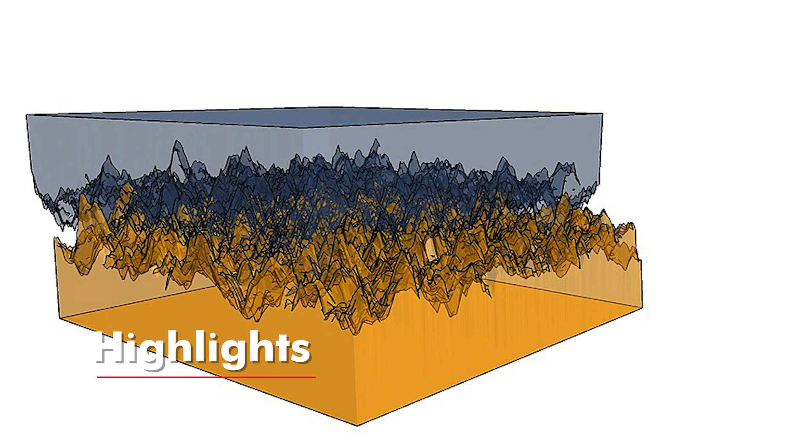There is no perfectly flat surface. Every surface, if you look at it from the micro angle, will have ups and downs, undulations. Is it possible to create a system of moving parts where friction can be negligible, close to zero?

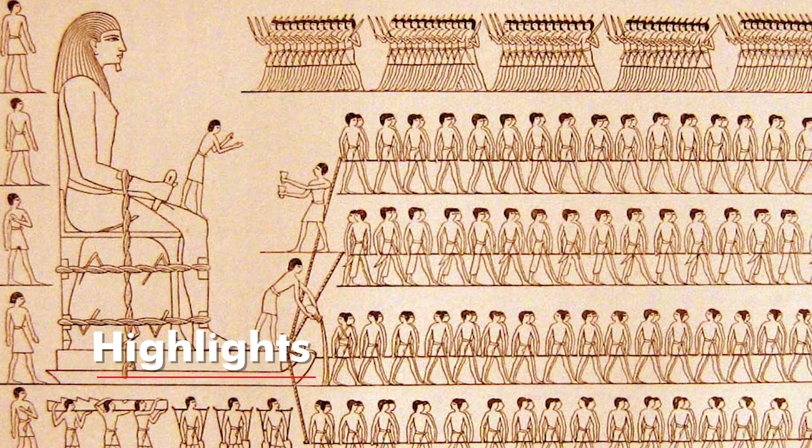Not exact zero, but the ancient cavemen, when they discovered fire, they were playing with friction, right? Exactly, they were the inventors of tribology. Probably yes, and there's also a painting in ancient Egypt I had seen long back, where the slaves are moving the stone to the pyramid, and somebody is pouring oil on the rope.

Now you're talking about a fluid film which is in micrometers, very thin. But even inside that, there is friction between fluid layers. Interesting. Now, pretty curious about grease's component, I never thought what grease is made of.

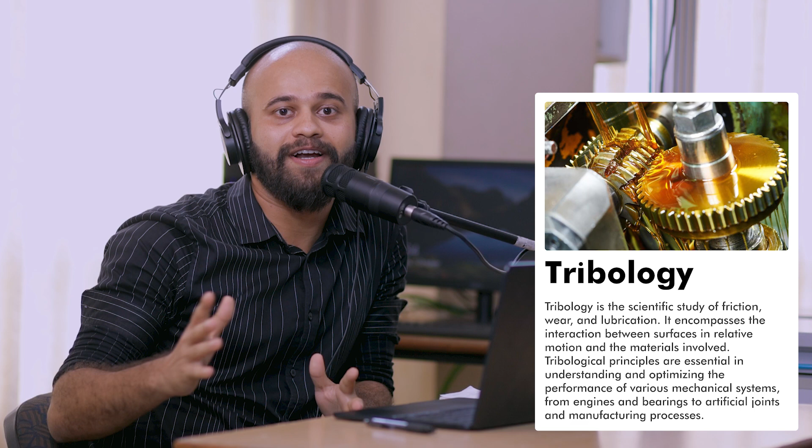And the most interesting part of it, one of the most interesting parts of friction is friction has its own field of study, and it's called tribology. I was intrigued when I heard that four years ago, that friction has its own field of study. Today we have a chance to get deeper into tribology, and the guest for today's podcast is Dr. Binu KG. Welcome to the podcast, sir.

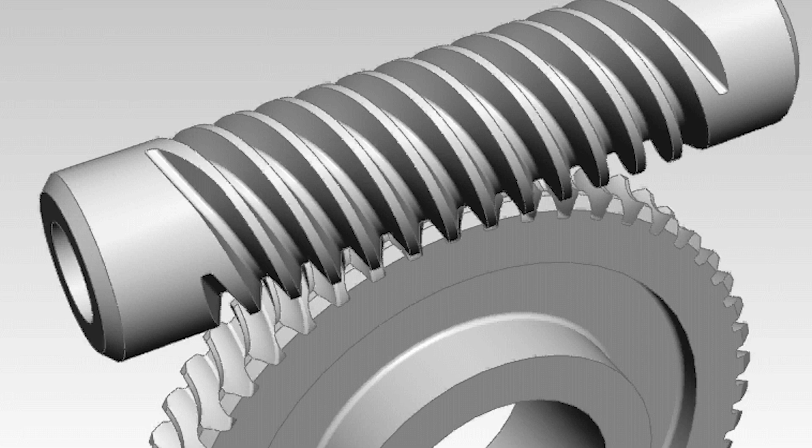Let me begin by saying relative motion is crucial to our existence. Everything we design as mechanical engineers, everything that moves, there will be two surfaces in relative motion, under force, pressed against each other, and they move - usually, most of the time, in opposite directions. That surface contact induces friction, because there are two surfaces.

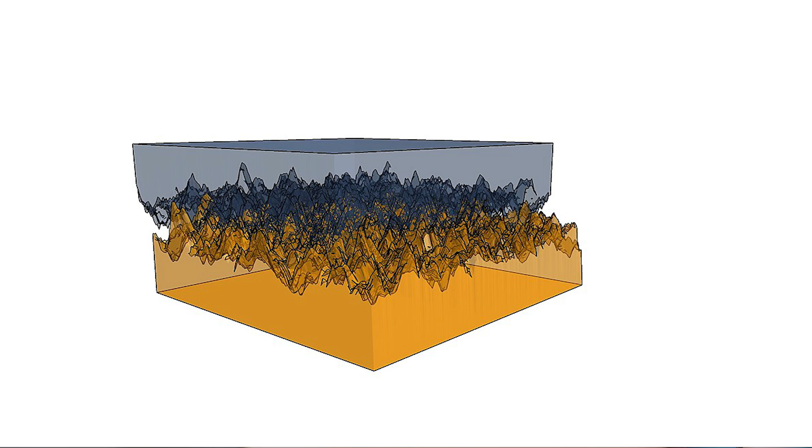Any surface, if you view it at a micro level, will have asperities - there's no perfectly flat surface. Every surface, from a micro angle, has ups and downs, undulations. And those undulations, when they rub together, generate heat. A good portion of the prime mover energy you provide to move the surfaces gets lost as heat, and this happens because of friction.

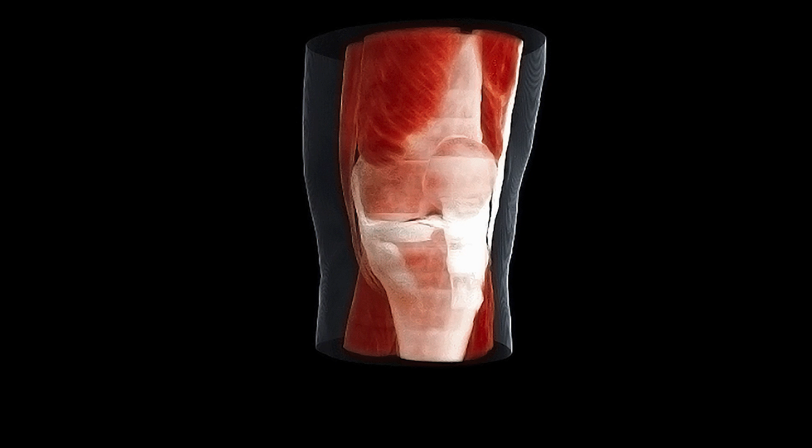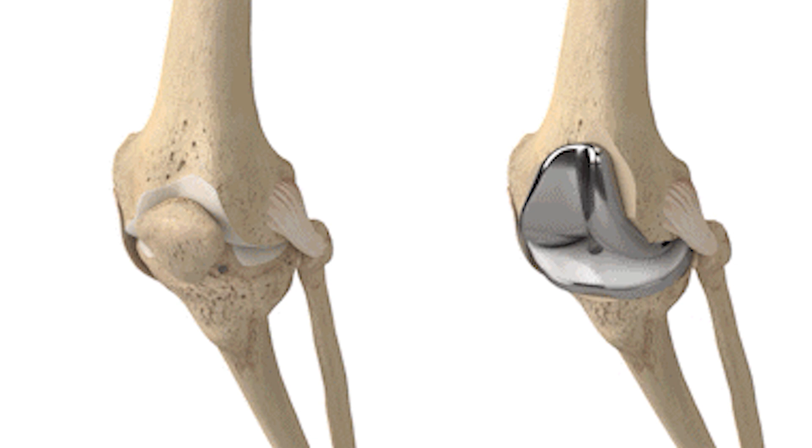Since you're from a life science background - take the example of a knee joint. The bones move relative to each other when you're walking, and there's synovial fluid that acts as a lubricant. So friction is there between them, and when it dries up it makes a noise as well, which can lead to arthritis, if I'm right.

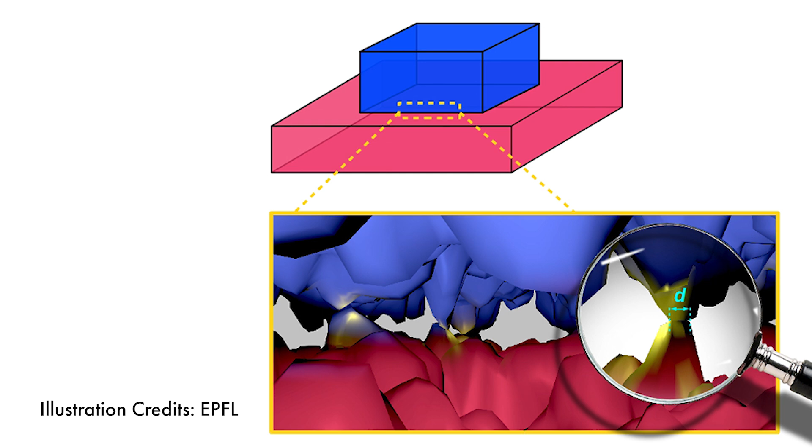So friction is fundamental in physics - wherever there are surfaces in contact undergoing relative motion, friction is unavoidable. It's fundamental. Fundamentally they're caused by the topological differences, the undulations in the surface - the asperities. So friction is very atomic, not a macroscopic phenomenon - it happens at the microscopic level, but it is observed macroscopically.

When we study friction, we study it from both the micro and macro level. At a macro level, you're not worried about the undulations or asperities - your systemic view is at the macro scale. But when designing precision instruments, you need to study at a much smaller scale, because even a minute one degree angle will induce a heavy loss. So tribology is a field where you study systems at both micro and macro level.

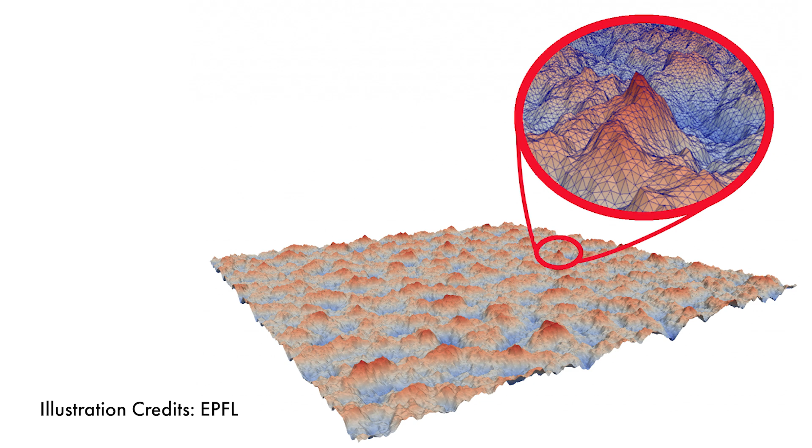There is something known in my field as nanotribology, in which friction and wear are studied at the nanoscale, where the physics is not the same - classical mechanics doesn't play a role. Instead you have quantum effects in play, and you also have to think in terms of non-Newtonian behavior.

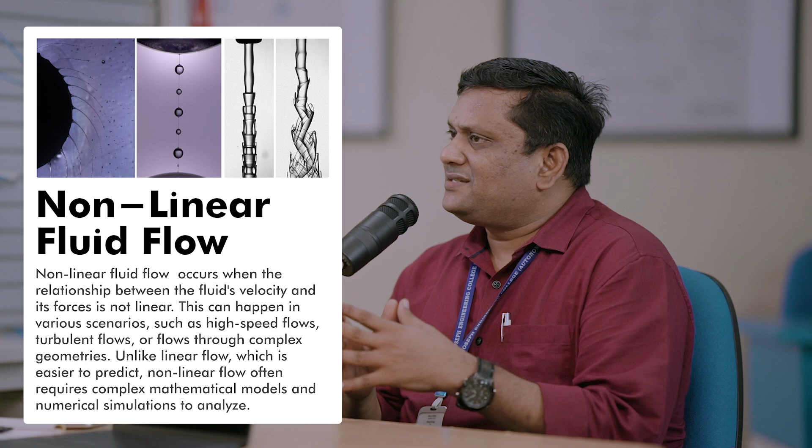If you are talking about fluid motion, then Newtonian fluid mechanics won't apply. There is non-linear fluid flow that you have to study. So yes, it's quite interesting, both at the micro level and at the macro level.

So any other unusual places you mentioned about the knee joint? Everywhere. Let me give you an example - computer systems. Right now processors are extremely powerful these days. So even CPUs also, there is a lot of friction that takes place there.

In older systems, there are a lot of electronic systems - let's talk about the case of a fan. The processor needs to be kept at a minimum temperature, therefore you have fans there, and the spindle of that fan runs at an RPM of 1500, where there is a lot of friction involved. So how do we keep that system working well? There are electronics also.

There are a lot of applications these days. When I hear about friction, I recall a sport called curling. Have you seen that? There are players sweeping the ice to control the direction of the stone and even the speed of stone to direct it to hit. Have you not heard about that game? Curling. Okay, I have not heard much about it.

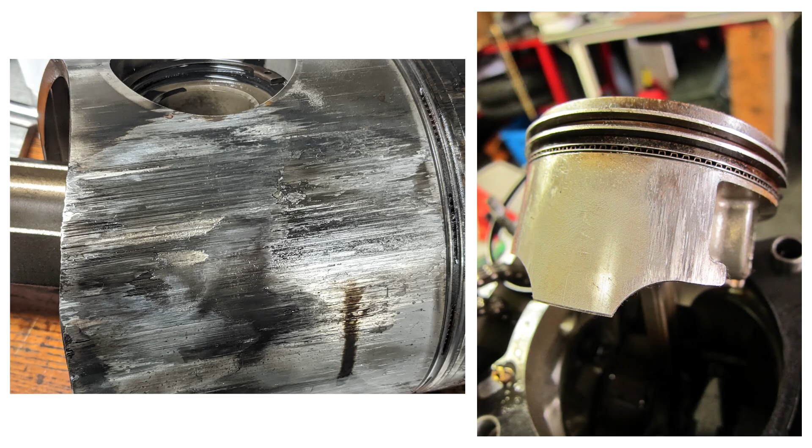Absolutely, there will be lubricant seizure - like the engine got stuck. Exactly, that's precisely - seizure is like imminent. The moment you have oil starvation in an automobile, seizure is like imminent. It will happen, it should happen in fact. Cost me a lot.

My professors used to always say that it is important that we link lubrication to the discipline with which we live. He used to take it to a philosophical notion, where he used to say that the good food habits that you have, the exercise that you do, all these are the lubricants that keep your body running smoothly.

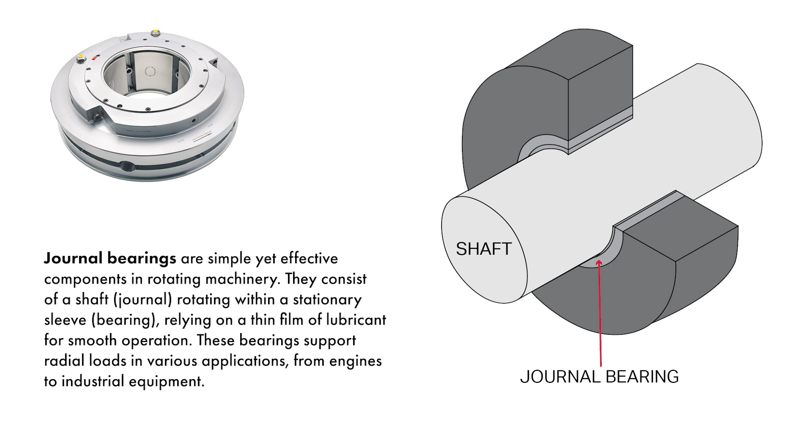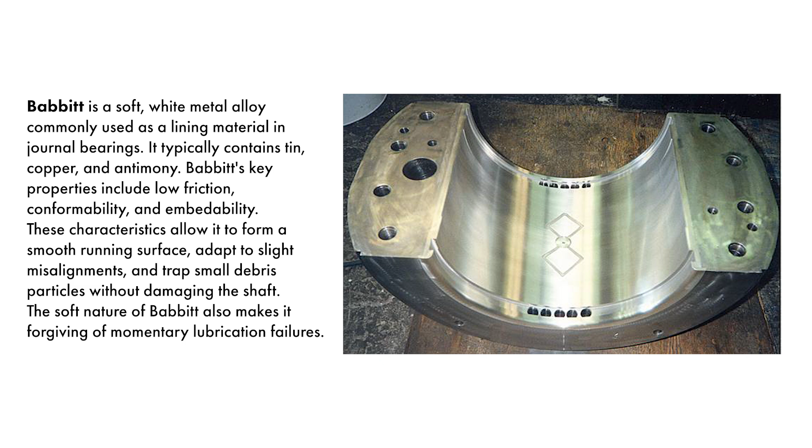You have a shaft, and in between the shaft surface and the bearing surface, you have the lubricant. That's how the rotary system works. Now, this bearing's inner lining can be Babbitt lined. Babbitt is a material with very low shear strength, so the moment there is shear, it shears off in small amounts. Once that Babbitt layer is completely worn out, you can reinstall it. So you're avoiding contact of two hard substances by providing a much lower shear substance in between. That is one way to bring down friction.

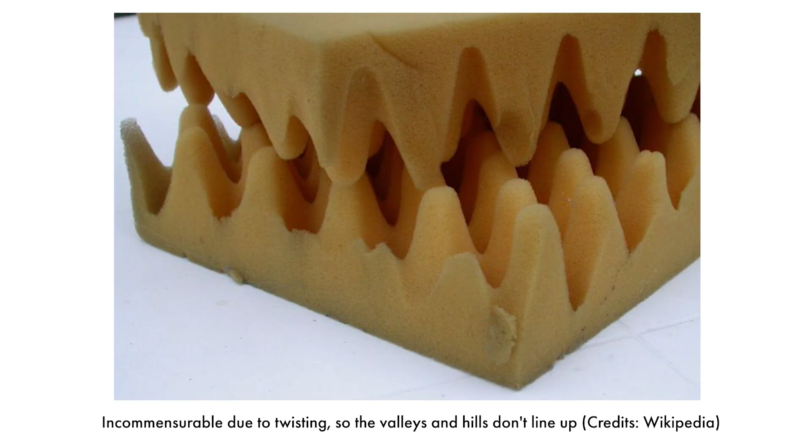But to completely remove friction, it's not possible. You'd have to get deeper into atomic level and play with the surfaces atomically, aligning the undulations perfectly. If the undulations or asperities align, they get stuck. If they're misaligned, in different directions, then it can actually be reduced.

One aspect of my research involved nanolubricants, which is a lubricant in which I add inorganic material as lubricant additives. These additives are at the nanoscale, typically 100 nanometers. I worked on something called TiO2, titanium dioxide. There are plenty of additives out there that have been worked upon, and some lubricants available in the market do have nanoparticles as lubricant additives.

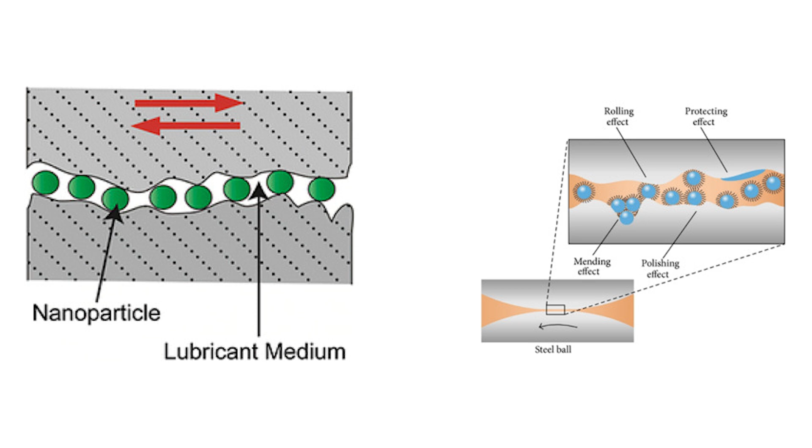But the issue is something else, I'll speak about that. When you have nanoparticle additives present between the two shearing surfaces undergoing relative motion, these particles, being strong, tend to break the undulations and even it off. They fill the space where there's a valley, and some of the peaks they break off. That way it's a mending effect on the surface, which then brings down friction.

How significantly? In my research, the use of nanolubricants has been found to bring down friction by 15 to 20%. That's the reason why there's plenty of interest now. The amount of research and publications happening in the field of nanolubricants is quite high. So there are definitely benefits.

But the issue is when you're adding nanoparticles to a fluid, it affects the shelf life of the lubricants. These nanoparticles, unless they remain in a suspended state, don't contribute. But when you keep lubricant aside in its bottle or can over a period, these nanoparticles, which have very high surface energy... when you go to nanoscales, individual particles have very high surface energy, their surface to volume ratio is very high.

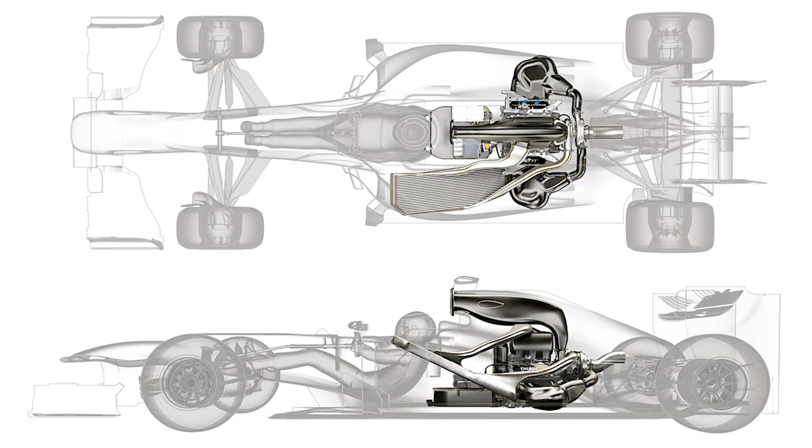So it's not a new science, but over the years the need for efficient lubricants became very high because we now have powerful machines. Why is an F1 vehicle possible? We have prime movers that can power that, but on a practical level, unless you have the tribological knowledge to prevent friction in such high-powered machines, they will not work. So growth in the automotive sector, transportation, and manufacturing is made possible because of the knowledge we built up in eliminating friction and wear. Tribology as a field of study has grown along with every other field.

There are three things tribology as a field looks into. Primarily, friction, which is one important component of this field of study. Second is a result of friction, which is wear, defined as loss of material under frictional force. The third aspect is lubrication. So friction, wear, and lubrication are three important components of tribology as a field of study.

So you can say it is an intersection of physics, mechanical engineering, and material science. A lot more than that, I should say. Mechanical engineering is fundamental because it deals with the forces involved, wear and tear. Friction comes from physics, and lubrication from material science. Is there any other component or field of study?

Physics is important, material science is important because tribological property is highly subjective to the material we use. There is a lot of chemistry involved too, because in a lubricant there are plenty of chemicals that we add to promote the creation of a thin film between the two interacting surfaces. So chemistry plays an important role. Physics, chemistry, mechanical engineering, material science for sure, and then the way you have modeled the system, mathematics plays a key role. Therefore, it is an intersection of multiple fields.

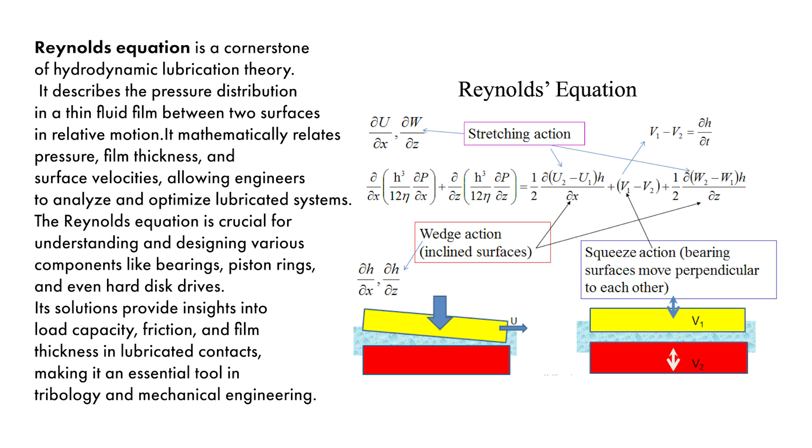So, I'm talking about hydrodynamic lubrication here. Let me break it down a little bit for you. When you have two surfaces and a gap in between in which you have your lubricant, there are three things that can happen.

One is the load that acts on these two surfaces is such that it will bring the surfaces in contact. Most of the asperities, the undulations, will be in surface contact. Even though you have lubricant film, there will still be some amount of solid surface to surface contact. The resulting lubrication is what we term as boundary lubrication, which is where you have maximum loss of energy. Friction is very high.

Now, if there is sufficient speed and the load is less, you will have a case where the surfaces are completely removed and you have a thin lubricant film in between. There is no surface contact here. The two surfaces are completely separated and there is an oil layer in between. Such a lubricant system is known as hydrodynamic lubrication.

That's my field of interest, hydrodynamic lubrication, where there is total separation, but then there is friction even there. This is because the fluid film that gets formed in between works in multiple layers, and there is shear forces between every layer. You're talking about a fluid film which is in micrometers, very thin, but even inside that, there is friction between fluid layers. That friction is sufficient to bring about significant loss of energy.

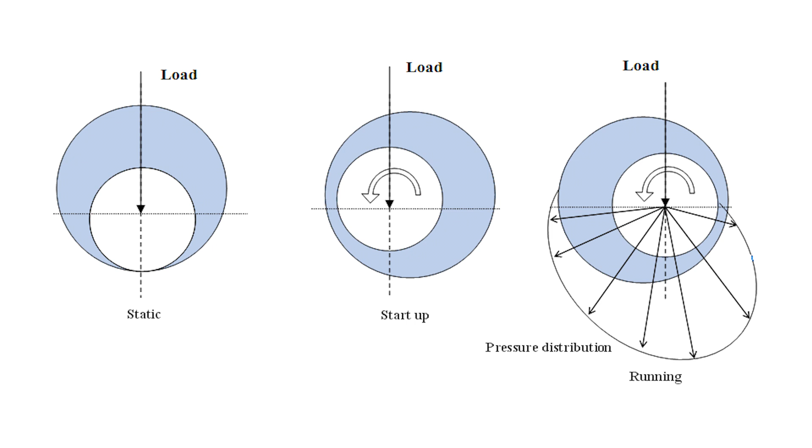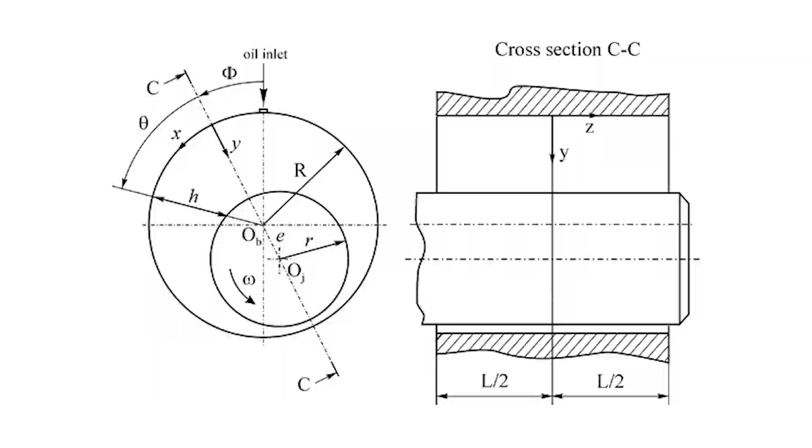Under load, the pressure developed within the fluid film should be sufficient to withstand the load. What Reynolds equation gives you, when solved, is the pressure distribution across the surface. If you have a circular bearing and open it up onto a two-dimensional sheet, at various points, what is the pressure? So the solution to the Reynolds equation gives me the pressure distribution across the fluid film. Is it uniform or unequal?

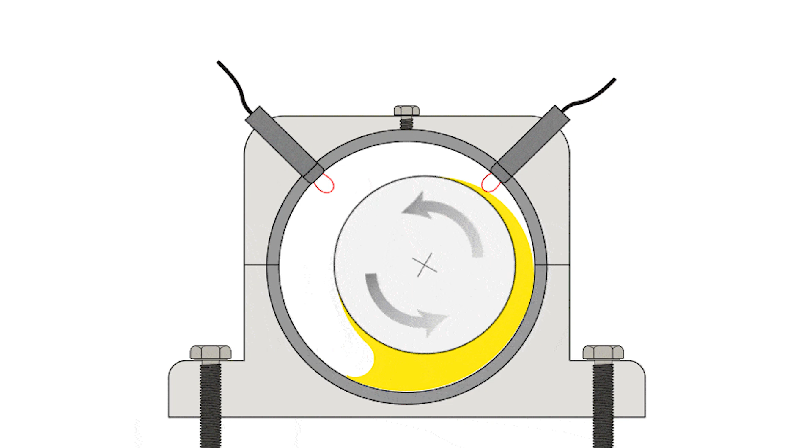No, it is unequal. At a certain angle, called the attitude angle, you will have the point where the fluid film is smallest. That region is where you have maximum fluid pressure as well. We're talking about RPM of 1500 and more. Therefore, on the other side, opposite to the side of maximum fluid pressure, you will have vacuum pressures.

Now, when you have a bearing and a shaft, and the shaft is turning, there will be a climbing action - the shaft tends to climb over the surface of the bearing, and that movement creates a suction which draws lubricant underneath. It's like when you're driving on a road on a rainy day and taking a swirl - the water on the road tends to get sucked inside, under the wheel, because of which a vehicle can slip. A similar action happens here, and that is how lubricant gets sucked into the maximum force region.

And this is hydrodynamic lubrication - hence the term hydrodynamic. This phenomenon is described in Reynolds equation. It actually explains the science behind how the lubricant gets sucked inside, how the pressure grows, how the pressure varies with attitude angle. All of this physical phenomenon is clearly described using this Reynolds equation.

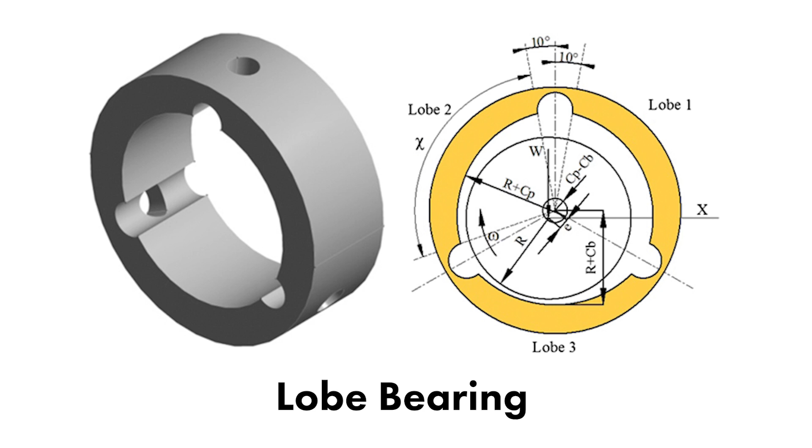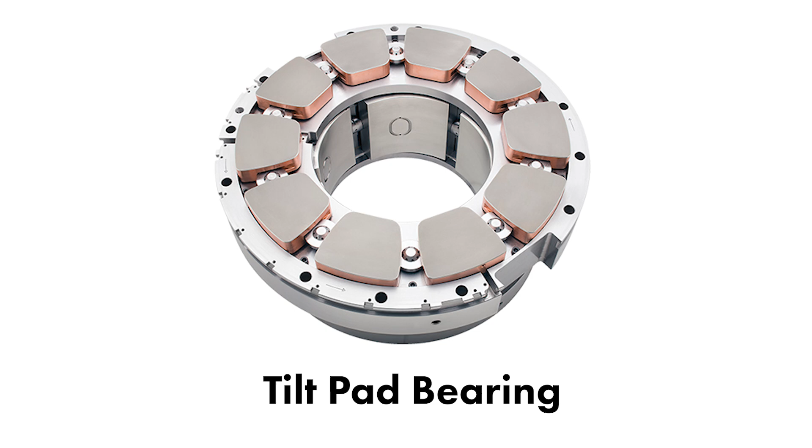Now people are playing around with two things. Number one, the geometry of the bearing - they started playing around with it. Can I design the geometry of the bearing such that lubrication becomes more efficient, and can more load be taken without getting into surface contact? In a journal bearing, the shape of the bearing can be modified. People started working on Lobe bearings, and then people also thought of having something called tilt pad bearings - instead of having a completely circular sleeve, they started breaking it into segments, and individual segments can also be moved at an angle.

You have the shaft in between. Instead of having a solid circular sleeve, you break the sleeve into multiple pads, and each individual pad, depending upon the friction, can either go out or in. So you're making sure that oil film will always be there - you're reducing the area by minimizing the size, adjusting the fluid film thickness. That way you are promoting the amount of load which the bearing can take.

As I said, people are playing around with the geometry of the bearing, and at the same time, they're also working on developing newer lubricants. There's also a field of study focused on the tribological properties of materials - if the material surface can have a sacrificial layer which can wear out, but that wear will not affect the operation, because friction you can't avoid at the end of the day. Don't you think friction is needed to move a car? In a sense, I'm not talking about the contact between a wheel and the road, where friction is needed. Exactly, absolutely.

I'm talking grip, about the gears, right? Correct, so they have to be in contact, to transfer energy from one part to the other. Yes, so the transfer happens because of friction, right? Definitely. If there was no friction, can there be energy transfer from one part to another? There are, you can see it in a hydraulic system or in a pneumatic system. There, we can use fluids to transmit power from one point to another. So there are systems in which you don't need gears, other ways in which you can transmit and play around with forces. But you make a very valid point when you say friction is essential as well.

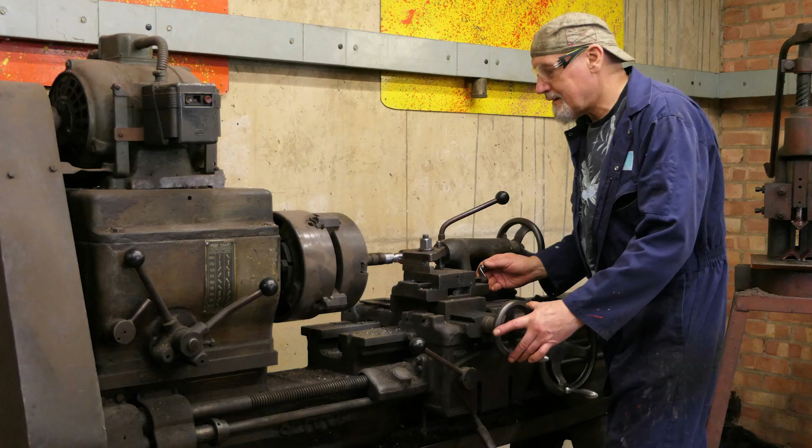Right, so as I said, I gave you the example of manufacturing processes. If you will go see a lathe, how does it work? Unless you get into material contact and then remove, the entire machining process is because of friction and wear. So there is an entire industry that runs on friction and wear. So friction by itself is not bad. Yeah, of course. But when you talk about durability of systems which we design and operate, that is where friction needs to be handled with care.

Nice. So any other law you are intrigued by or a fan of, other than Reynolds law in tribology, that is still really important for the field? Colloidal stability is something that I actually worked on, because, as I said, increasing the stability of nanoparticle suspension in lubrication is a challenge we are facing even now. It's not yet resolved as such.

So what I tried to do was study the nanoparticles in their hydrophilic and hydrophobic nature, and then try to narrow down on a surfactant which, when coated on individual nanoparticles, will prevent them from coagulation. The issue of stability is because when nanoparticles come closer to each other, the surface to surface attraction is so high that they immediately form agglomerates and then settle down. So optimizing surfactants, there are plenty in the market, we worked on selecting the right choice for TiO2, titanium dioxide nanoparticles.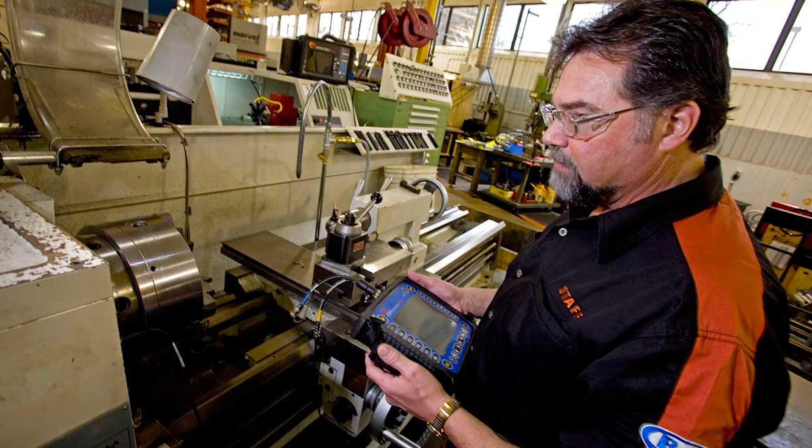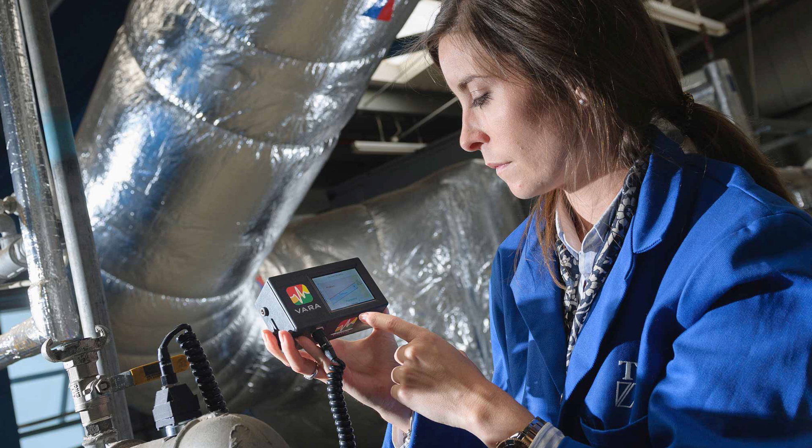It's also closely associated with mechanical maintenance. Take a huge manufacturing plant like TVS Motors - these plants need to be maintained well. So tribology is closely linked with machine health monitoring, asset management. How do you study the reliability of a machine? Lubrication and tribological aspects play a big role there. Plant maintenance is one area where tribologists have a significant impact.

In manufacturing, the process of machining itself happens through friction, so there's a lot of tribology at play there. Automotive, manufacturing, oil lubrication, plant maintenance, asset management - all these are fields open for tribologists, and largely R&D.

How about condom manufacturers? Just kidding. Yeah, it probably does involve lubricants.

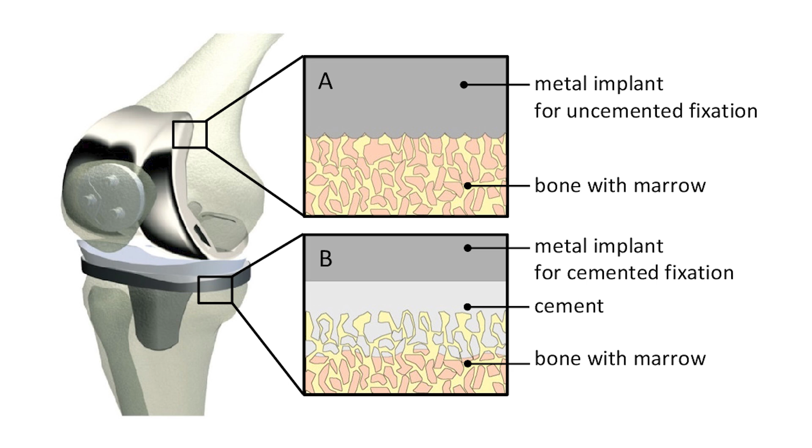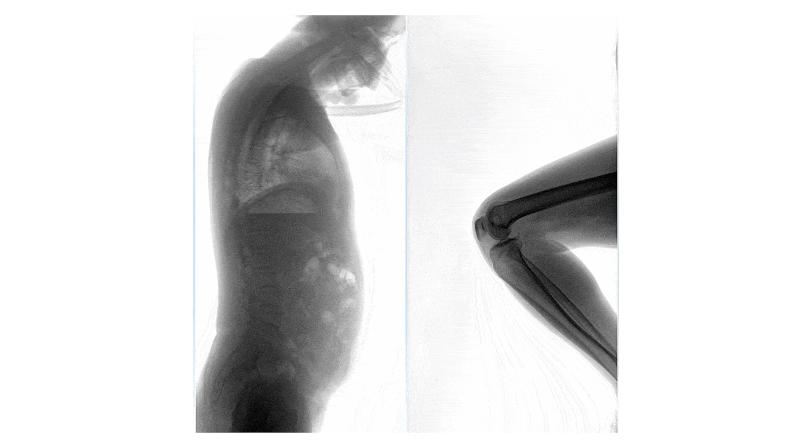Prosthetics is an interesting field of research too - like joints. Artificial joints inserted into the human body: the choice of material is extremely important, they should be compatible with body fluids. Artificial lubricants cannot be used there, so the tribological properties of materials are the focus - which materials can be used to prepare these artificial joints for insertion into the body. A lot of R&D is going on in this.

Let's look at other applications. Engine components - we've talked about it - pistons, bearings, gears to reduce wear and improve efficiency.

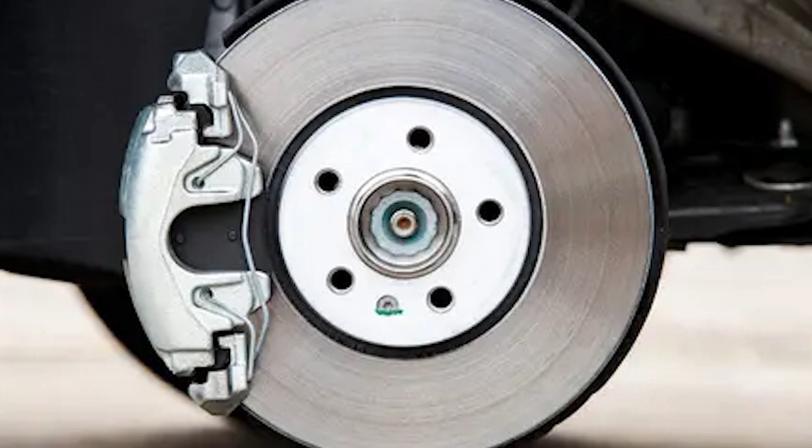Brakes and clutches operate through surface contact, but there we need more friction - there's no point in lubrication since we need efficient friction. So increasing friction between surfaces is also part of tribology, though tribology mainly deals with negating friction. There are applications where friction is good, but tribologists are not as interested in increasing friction.

Then there's joint implants - tribology helps design artificial joints that mimic natural movement and reduce wear over time. Also dental applications - it's used in developing dental implants and restorative materials.

You've mentioned manufacturing and machinery, bearings and gears, lubrication systems. Then renewable energy, wind turbines - tribology is used to improve the performance and reliability of wind turbine components.

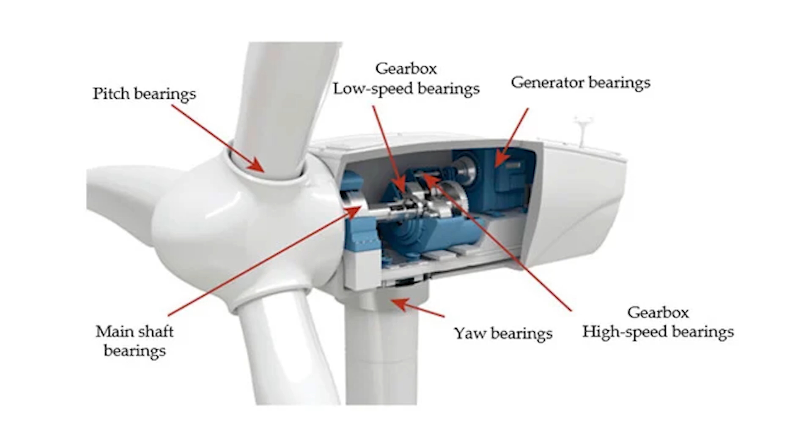Every rotary system, every turbo machine - all systems involving rotary transmission of energy and power need some form of journal bearings, and their lubrication is a must. So in the design of the bearing itself, we need to think about how efficiently it can be lubricated. Bearing design is an important aspect of tribology.

Design of roller bearings, journal bearings, hydrostatic bearings - bearing design is an integral part of tribology. This field has been in play for so many years that journal bearings, ball bearings, roller bearings for almost all load applications are well designed now, so for an application I just have to choose the right one.

Take SKF bearings for example - SKF has bearing solutions for all our needs, but I should be smart enough to decide which is the right solution for my application, and that knowledge comes from tribology.

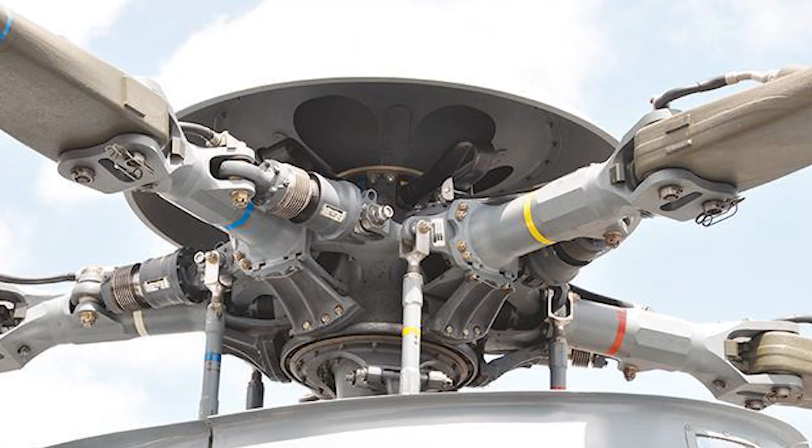You would normally go for ball bearings there, which can be lubricated by grease and so on, because the issue with a hydrodynamic bearing is that in case of oil starvation, there's imminent seizure, failure. You can't take that risk with an aerospace industry. Is it because they operate at very high temperature, that's why you can't use oil? Yeah, that is a reason.

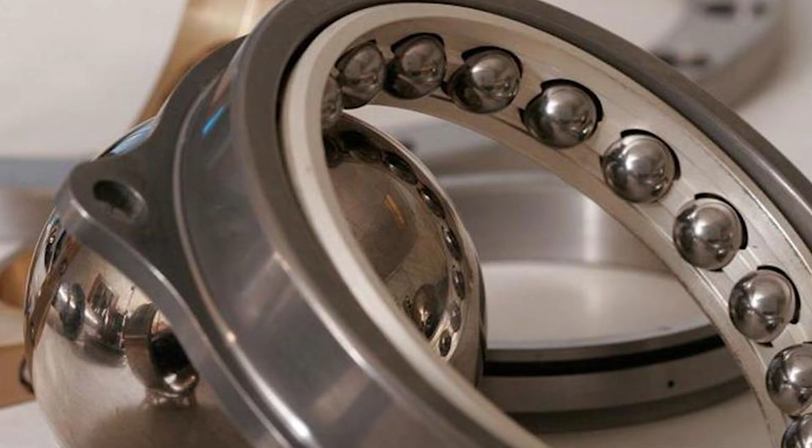But mostly oil starvation needs to be eliminated. God forbid any reason causes lack of oil flow. Your automobile seizes, you are on road, right? And if some seizure of that nature happens at a higher altitude, you're gone. You go much higher. So that's the reason why most aerospace industries don't actually prefer journal bearings. So they operate on grease, ball bearings, which is internally grease.

Correct. And now, pretty curious about grease's component. I never thought what grease is made of. So what is the material structure, what is the composition of grease? Is there also a colloidal stability you were talking about? Does that play any role in the grease? I'm not studied grease much, but from what I know, I will say that it is also a petroleum based product itself. Okay, but it's not a fluid, right?

It's, should I say, a colloidal mixture, a semi-solid. Probably I would actually say that, with a lot more additives and chemicals that go into manufacturing them. It doesn't flow, and it's actually used where the load is very high, but which is not subjected to very high speeds. So it can resist the amount of load that can act. Speed does play a major role.

Okay, and also opposite to that, is there a limit to speed? Yeah, of course. See, again in hydrodynamic lubrication, as I said, there is complete separation of materials, and the entire shear force is taken care of, is supported by the pressure built inside the fluid film. Now at extremely high RPM, that fluid film can break down. And the moment that fluid film breaks down, that's the end of lubrication there. So speed, there is an upper limit to speed for every application.

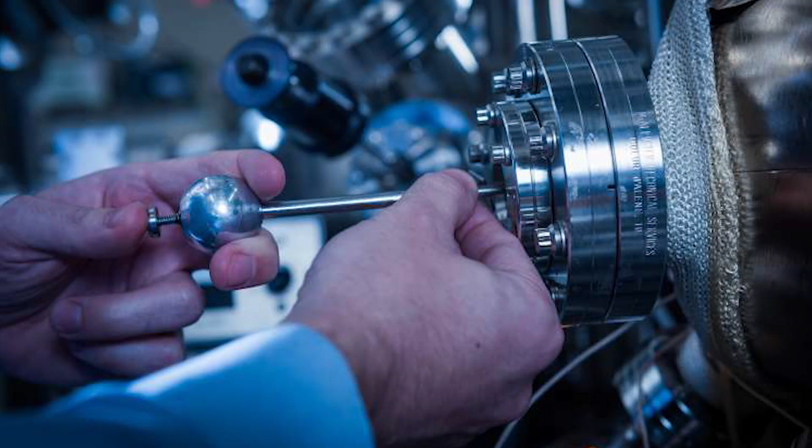Aerospace, as you mentioned just now, spacecraft components. Tribology is critical in ensuring reliability and longevity of components used in spacecraft and satellites. Correct. Interesting. Aviation, absolutely. Basically, those applications focus more on selecting the right material, because lubrication is not a sustainable solution there. There the material by nature, because of its surface properties, should be tribologically useful.

Because you can't think of having lubricant flow at very less gravity situation, right? Because it will not work out, gravity in play, correct. So fluids are not a solution there. It could not be a solution. So you need to look at solid lubricants as well.

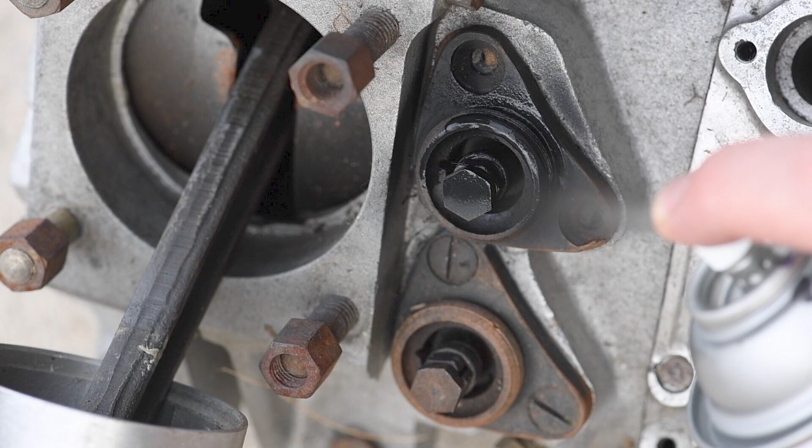Graphite, right, okay, graphite is a solid lubricant. See, graphite doesn't resist shear. It's actually very limited resistance to shear force. So if you are using graphite as a lubricant, friction is there, but at operational load and speed, it can work. So there is a lot of research happening on solid lubricants as well. Doesn't it break when the load is a lot? It does. No, you're not talking about cubes, as I said. Sheets of it. The area of lubricant film is very less, so you're actually talking about very limited amount there.

I just imagine I'm breaking the pencil lead. No, because load is more. Exactly. And no, we actually want it to break. See, we want that shear to happen. Oh, okay, right, we actually want it. See, if your graphite holds up and resists movement, then it is increasing friction. So the benefit of graphite is that it shears off easily.

So where is graphite used as a lubricant, which places? You just now spoke about everywhere where fluids can't be used. Where, like example? Say for example in industries where oil is bad, say for example pharmaceuticals maybe, where in case if oil gets mixed up with the product, it will be an issue.

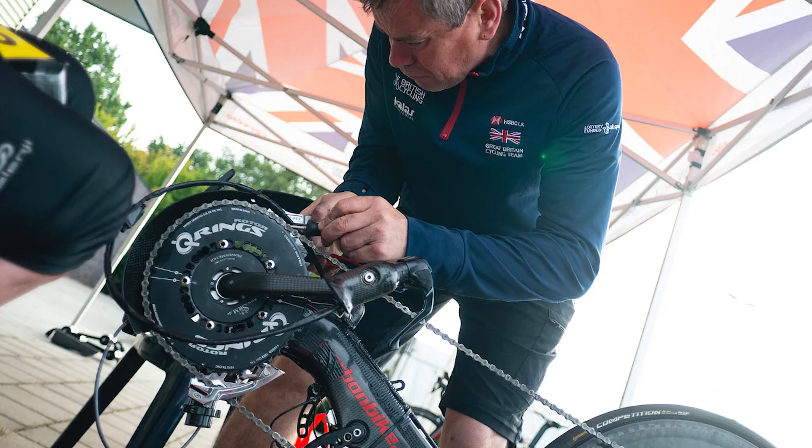When you see fluids can only be applied where the system has a reservoir which can hold the fluid lubricant. Otherwise it will just flow off, isn't it?

So what are the new ideas? Like you mentioned about nanoparticles used in... Correct, that's one idea we've explored these days. Absolutely, I was reading that there is a lot of need for green lubrication. Lubricants by nature have got a lot of chemicals in them - there used to be a lot of use of sulfur, right? And the materials that go into formulation of lubricants can contribute to greenhouse emissions as well. So it is important to build or formulate lubricants which are sustainable.

The paper I was reading about tends to make use of calcium carbonate as an additive. So that is one area of tribology in which there is a lot of work happening. The reason why my PhD student is working on an organic lubricant, biolubricant, is because of that - to make sure the lubricant is sustainable. So that is one field of study.

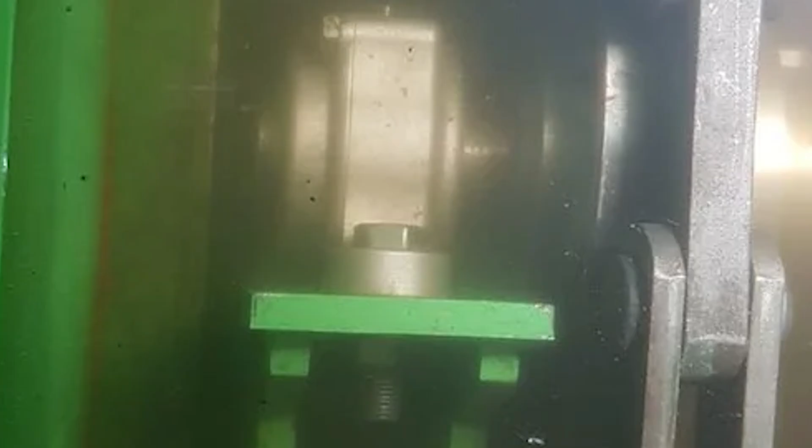See, there are applications which involve submerged bearings - the lubrication is so important that this rotary system bearing, this entire system is immersed in a container full of oil, right? So as to always make sure there is lubricant. That is one area.

So depending upon the application, depending upon the area of application, the need for lubricants will vary. Okay, what is apart from green tribology? What are the other areas?

Yeah, other areas of interest I would say is, of course, nano tribology. It is opening up spheres where we are looking at the relative motion at the atomic level. So how can we eliminate or try to reduce friction at that scale? This is again something which has been under study for more than two decades.

And design custom surfaces. Absolutely. So studying tribology at the nanoscale will open up a lot of avenues to bringing down friction, is what I feel. Can lead to better medical equipment. Absolutely.

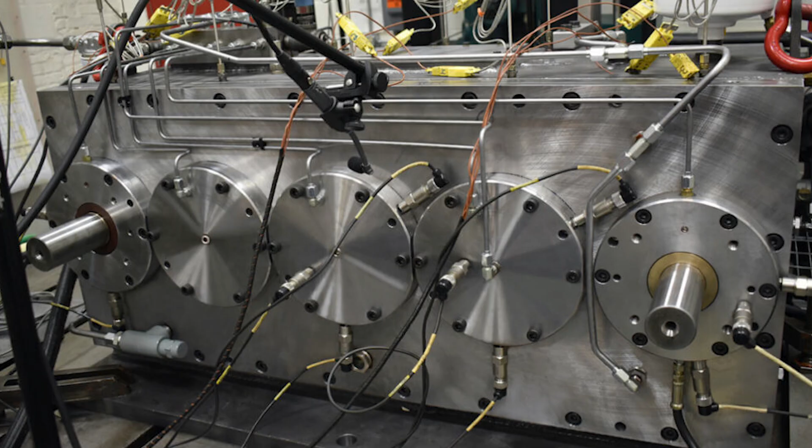Then AI and machine learning - artificial intelligence and machine learning - is these days applied a lot more in studying machines' health, predicting failure. You mean they're taking data from machines? Exactly, on the performance. You will have n number of sensors mounted on those machines involved in a manufacturing process, constantly measuring vibrations, motion, temperature, pressure, noise levels. These sensors record this data, and you are able to predict failure.

So you are able to, you will be in a position to understand the consumption of lubricants much better - how much lubricant is needed, is there a possibility of oil starvation, when do you need to replenish it? That is one thing.

And lubricant has also got this additional benefit of carrying away parts which indicate how well your system is running, because there is a surface contact happening. Lubricant flows through it, so whatever little particles that get formed there is taken away by this oil. So you study that oil, and that oil analysis will give you a separate indication, a separate set of data.

Is there wear happening? How much amount of wear particles are happening from the moving parts present in the oil? That will give you a better picture into the health of the instrument as such.

Artificial intelligence is used heavily now. In fact, yesterday I began a course for my students called AI for Mechanical Engineers. We actually felt the need for that. Where do you think AI can be put in mechanical engineering? Everywhere.

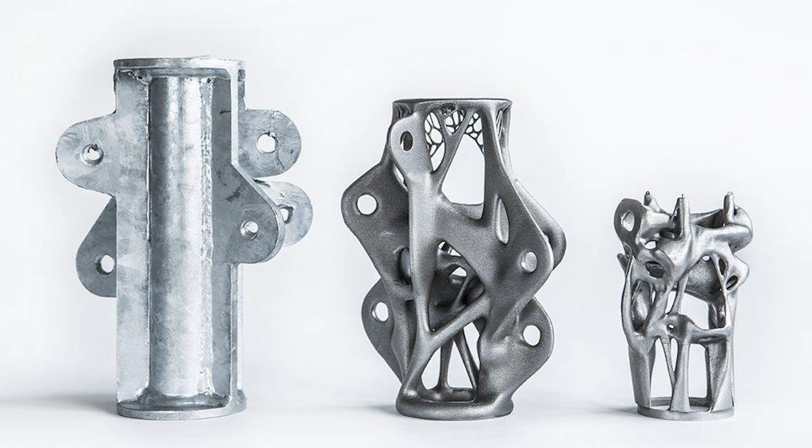There is this field of generative design. I need to optimize the weight and strength. Normally we do manual calculations and use software such as ANSYS to analyze weight distribution so I can bring it down. Now that AI is there, it will augment my ability, give me options, and engage with me in my design process, making sure the component I design has minimum weight and maximum stiffness. That's one field.

Next, as I said, predictive maintenance. When is a machine expected to fail? When do I need to replace the bearings? That sort of maintenance activity and scheduling can be more efficiently done now.

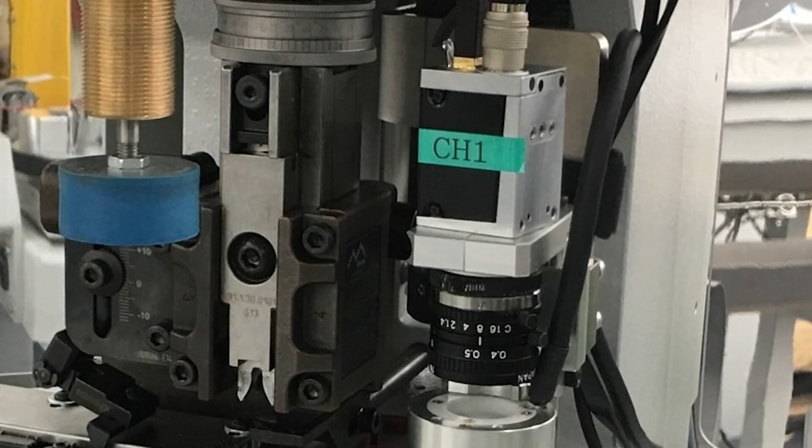And smart manufacturing, additive manufacturing, and fault detection in the parts that I make. Say for example, if I'm manufacturing 1 lakh bolts and nuts in my plant, it's not feasible to do a quality check of every part. But your AI, through image analysis, if every part undergoing production has a camera recording it, based on these images the computer vision software can actually identify micro cracks.

So there is something called high temperature tribology. What do you mean by high temperature? You meant the jet engines? Elevated temperatures where there is combustion involved. What is high temperature in tribology? What is the range we are looking for?

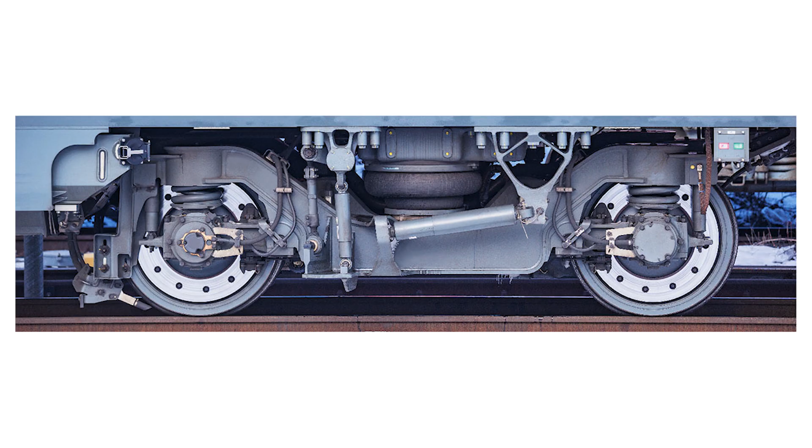The normal bearings and lubricants that we use barely cross around 70 degree Celsius. Anything above that, your lubricant loses its viscosity entirely, so it doesn't satisfy its purpose. Imagine dealing with 300, 400 degrees Celsius and more - your lubricant will vaporize. So how do we deal with that?

There you need to focus on the tribological properties of the materials itself. You cannot have a medium there. The materials we choose and their properties will have to take care of friction. Even turbines deal with friction as well, and they operate in very high temperature.

It depends on the system or the space where the temperature is high. Normally even if you have a 3000 RPM shaft and bearing, the temperature can be brought down because the lubricant itself takes away the heat - lubricant can also act as a coolant. That's the dual benefit there. So turbines are fine, all sorted out - your normal lubricants are enough for that.

I'm actually talking about scenarios where the temperature goes above 150, 200 degree Celsius. There, your typical petroleum-based, oil-based lubricant won't work. That's what they actually speak about - it's an ongoing research.